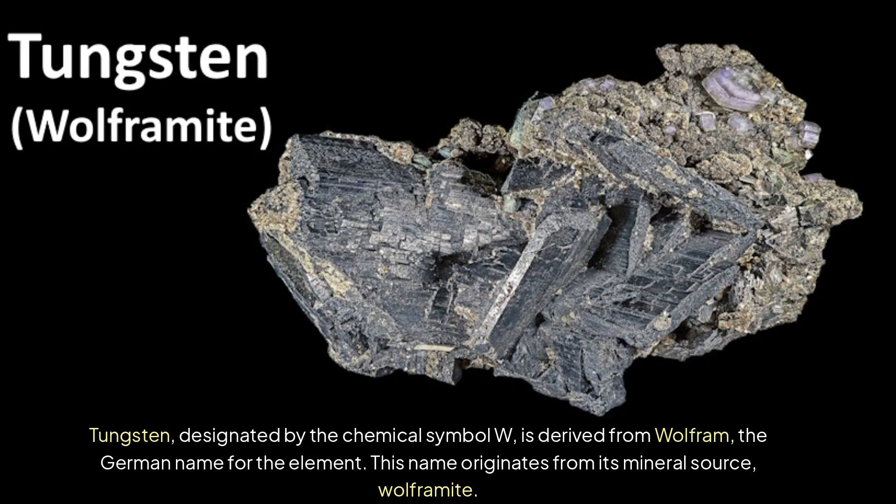Tungsten, designated by the chemical symbol W, is derived from wolfram, the German name for the element. This name originates from its mineral source, wolframite.

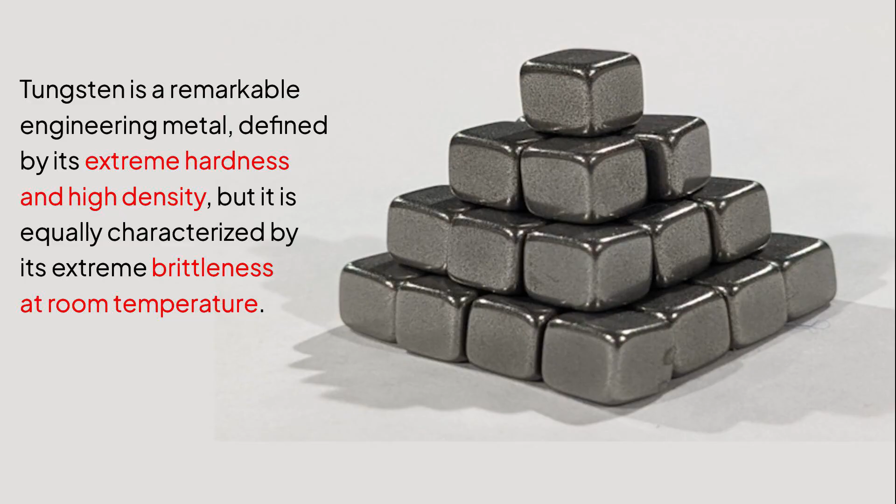Tungsten is a remarkable engineering metal, defined by its extreme hardness and high density, but it is equally characterized by its extreme brittleness at room temperature.

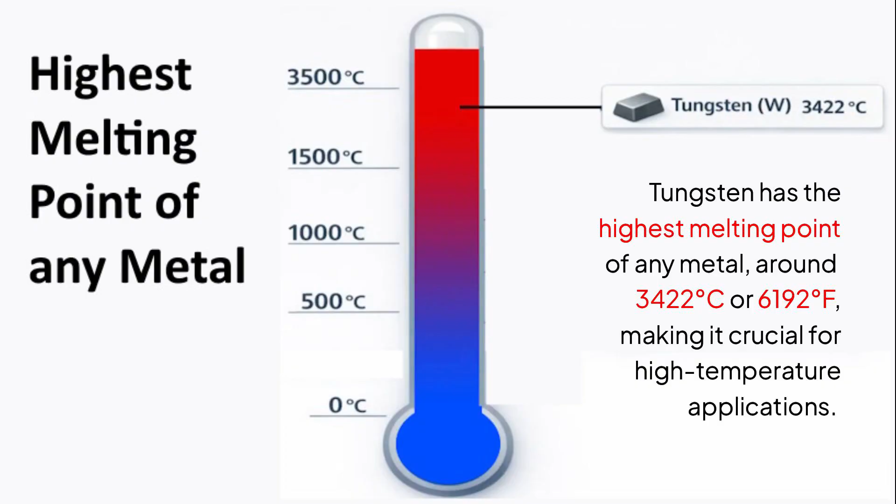Tungsten has the highest melting point of any metal, around 3,422 degrees Celsius or 6,192 degrees Fahrenheit, making it crucial for high-temperature applications. Tungsten is an extremely dense metal, with a density of 19.3 grams per cubic centimeter, or 19,250 kilograms per cubic meter, which is comparable to that of gold.

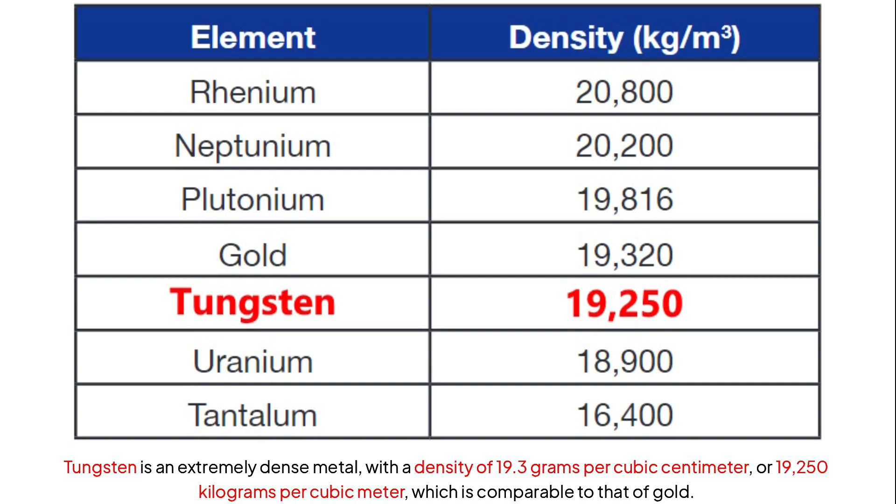It is roughly 1.7 times denser than lead, 2.5 times denser than steel, and over 4 times denser than titanium. Tungsten is roughly 7 times, or 700% heavier or more dense, than aluminum.

Tungsten is generally not soluble in most common acids, such as nitric acid, hydrochloric acid, or sulfuric acid. It is known for its high corrosion resistance and chemical inertness.

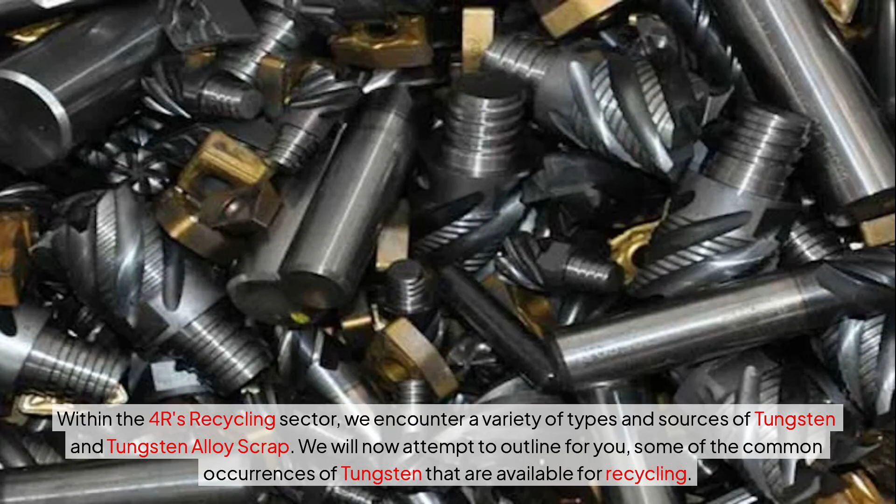We will now attempt to outline for you some of the common occurrences of tungsten that are available for recycling.

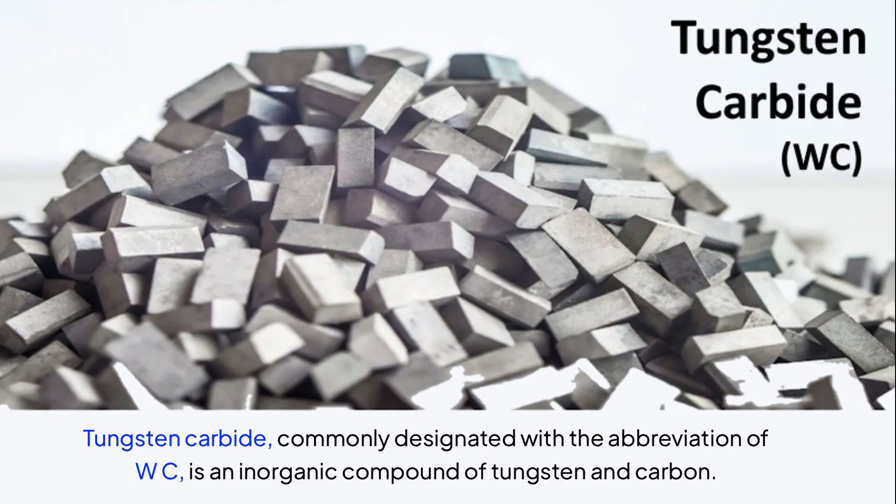Tungsten carbide, commonly designated with the abbreviation WC, is an inorganic compound of tungsten and carbon. One of the most commonly encountered forms of tungsten scrap is end-of-life carbide cutting insert tools.

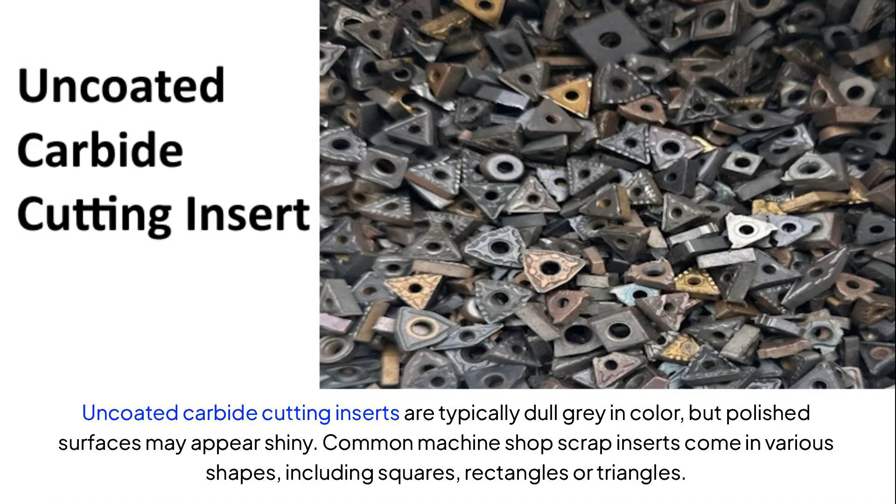Uncoated carbide cutting inserts are typically dull gray in color, but polished surfaces may appear shiny. Common machine shop scrap inserts come in various shapes, including squares, rectangles or triangles.

Coated tungsten carbide cutting inserts may commonly contain a titanium nitride coating, which appears as a golden color, and are commonly found in hexagon, octagon or diamond shapes.

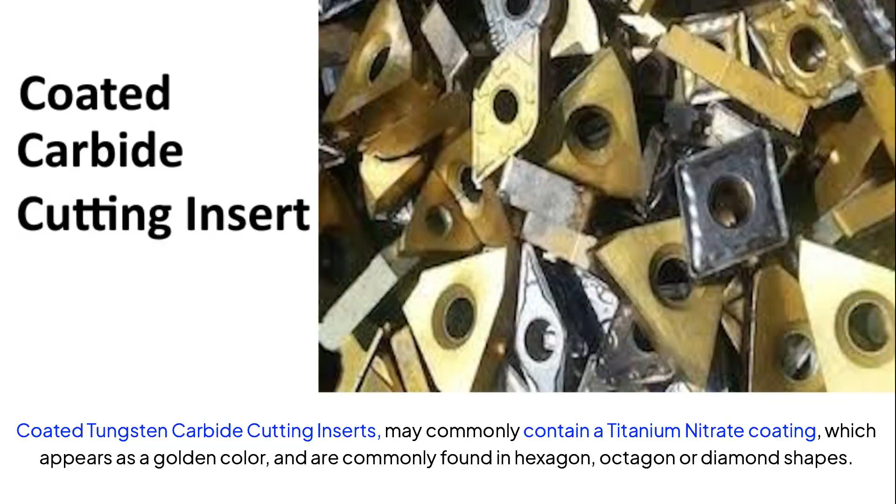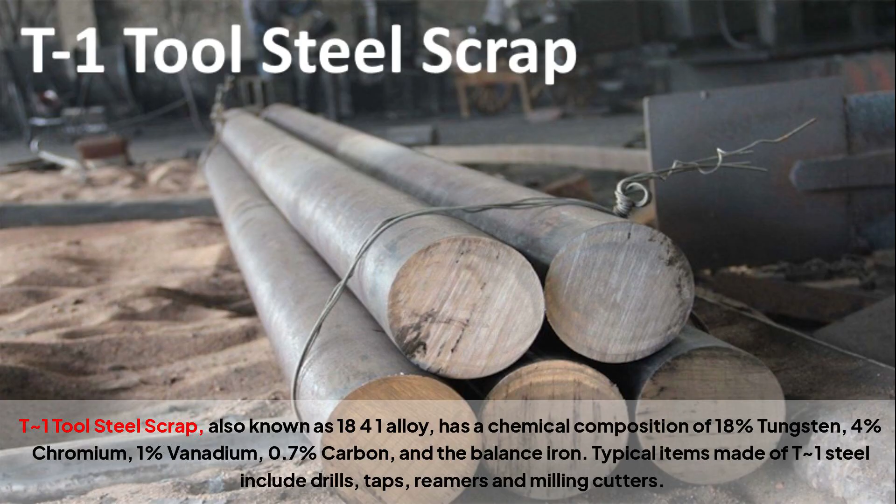Other common scrap tungsten alloys are found in the form of scrap tool steels. T1 tool steel scrap, also known as 18-4-1 alloy, has a chemical composition of 18% tungsten, 4% chromium, 1% vanadium, 0.7% carbon, and the balance iron. Typical items made of T1 steel include drills, taps, reamers and milling cutters.

T5 tool steel scraps have a typical composition of 18% tungsten, 4% chromium, 2% vanadium, 0.8% carbon, 8% cobalt, and the balance iron. Common items made of T5 alloys include lathe and planer tools, cut-off tools and forming tools.

T15 tool steel scrap has a chemical composition of 12% tungsten, 4% chromium, 5% vanadium, 1.5% carbon, 5% cobalt, and the balance iron. Common items made of T15 steel include blanking dies, broaches, punches and also milling cutters, lathe and planer tools.

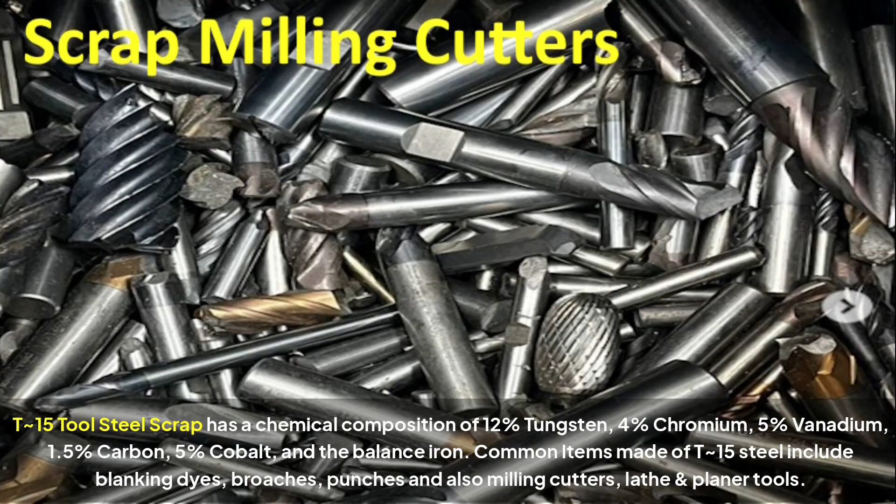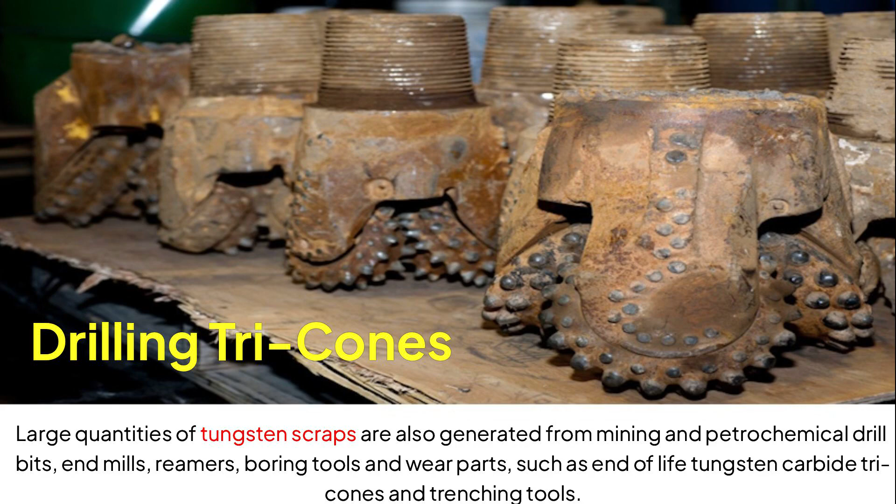Large quantities of tungsten scraps are also generated from mining and petrochemical drill bits, end mills, reamers, boring tools and wear parts, such as end-of-life tungsten carbide tri-cones and trenching tools.

Tungsten filament scrap includes wires, mesh, coils, blanks, and sinter bar ends, and filaments from incandescent, halogen, and other specialized lighting or bulbs. Tungsten filament scrap also comes from electronic and vacuum tubes, cathodes and filaments in X-ray tubes, electron emission and ion gauge tubes from medical or specialty lab equipment, and industrial equipment, such as arc welding electrodes from TIG welding.

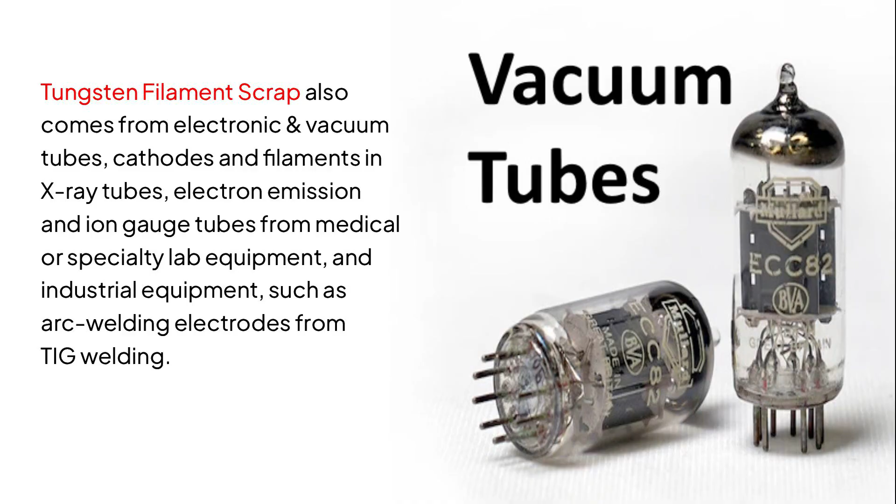Tungsten sludges and residues, such as grinding swarf, tungsten carbide powder, wet or dry filtration scrap, and polishing dust, are processed through chemical methods or hydrometallurgy.

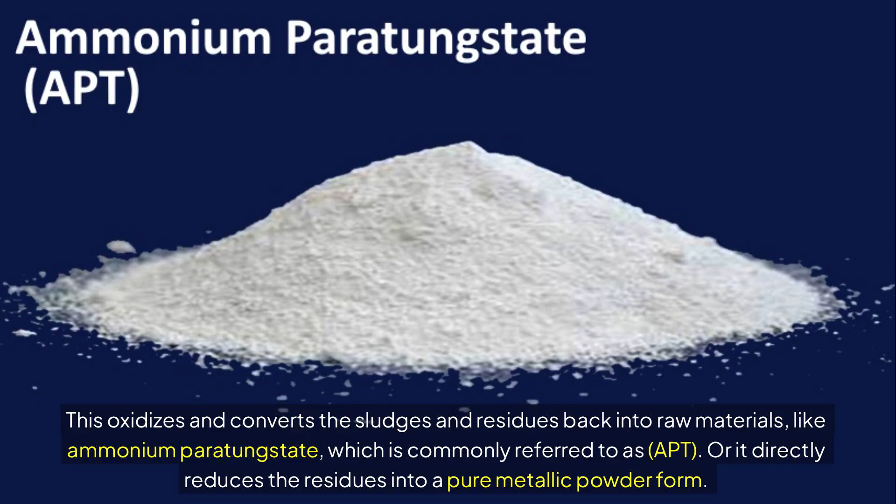This oxidizes and converts the sludges and residues back into raw materials, like ammonium paratungstate, commonly referred to as APT. Or it directly reduces the residues into a pure metallic powder form.

Rhenium tungsten alloy is a high-performance refractory material, designed to overcome the brittleness of pure tungsten, while maintaining an extremely high melting point and strength.

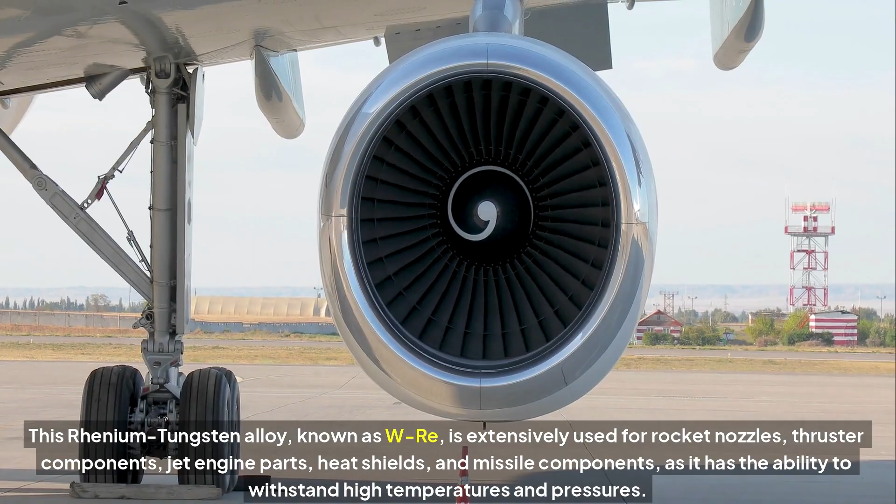This rhenium tungsten alloy, known as W-Re, is extensively used for rocket nozzles, thruster components, jet engine parts, heat shields, and missile components, as it has the ability to withstand high temperatures and pressures.

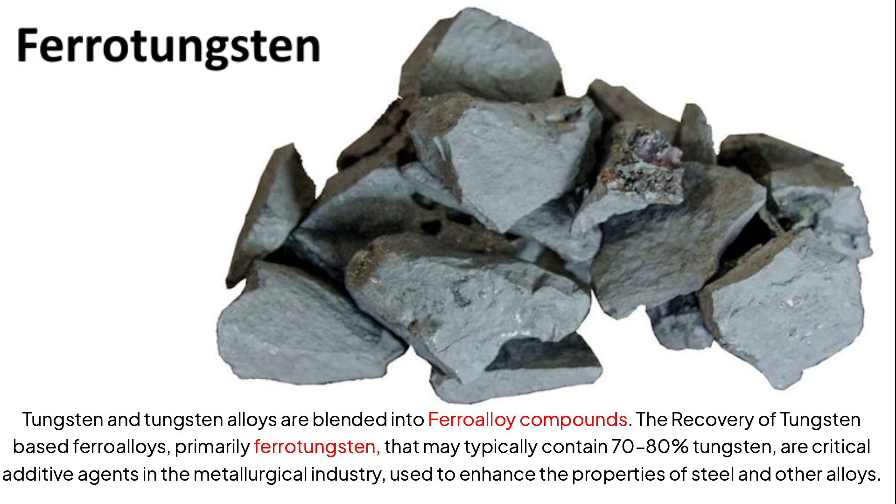Tungsten and tungsten alloys are blended into ferroalloy compounds. The recovery of tungsten-based ferroalloys, primarily ferrotungsten, which may typically contain 70 to 80% tungsten, are critical additive agents in the metallurgical industry, used to enhance the properties of steel and other alloys.

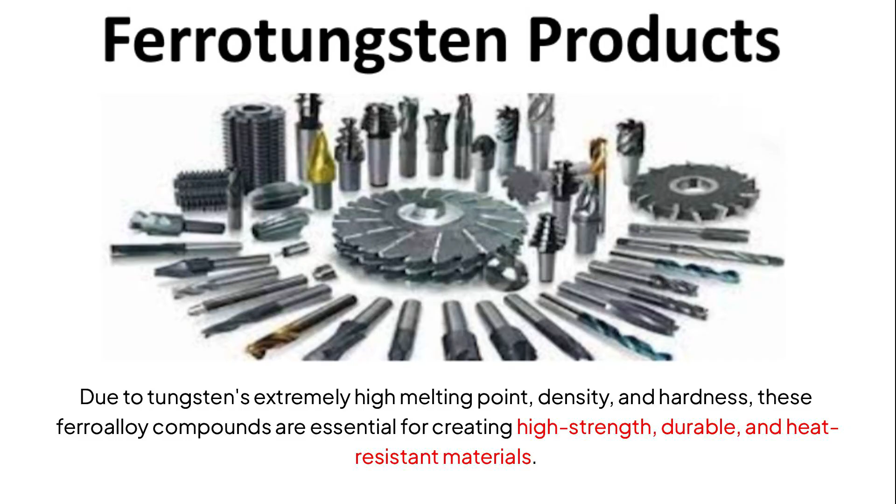Due to tungsten's extremely high melting point, density, and hardness, these ferroalloy compounds are essential for creating high-strength, durable, and heat-resistant materials. We intend to explore other types of scrap metals, including minor metals and exotic alloys, at some point in the future.